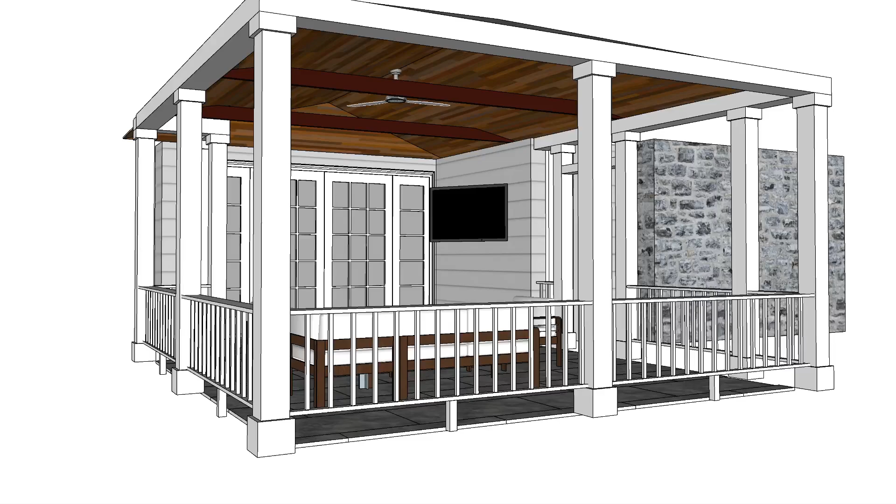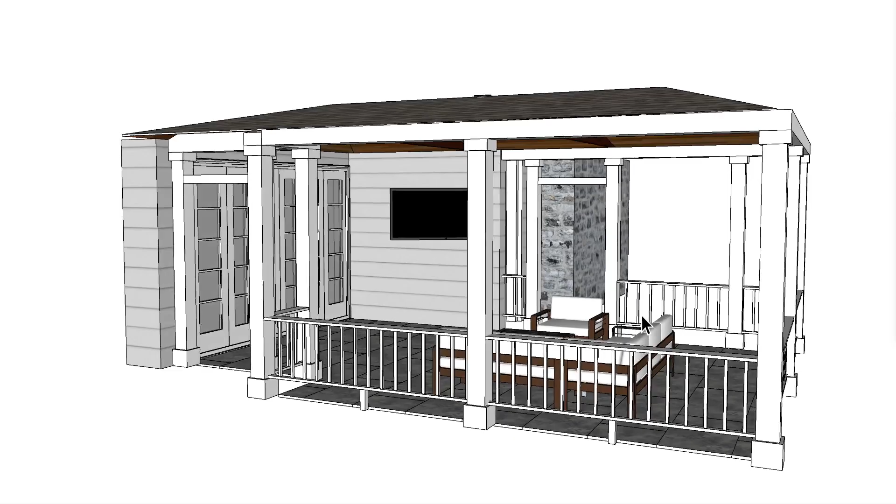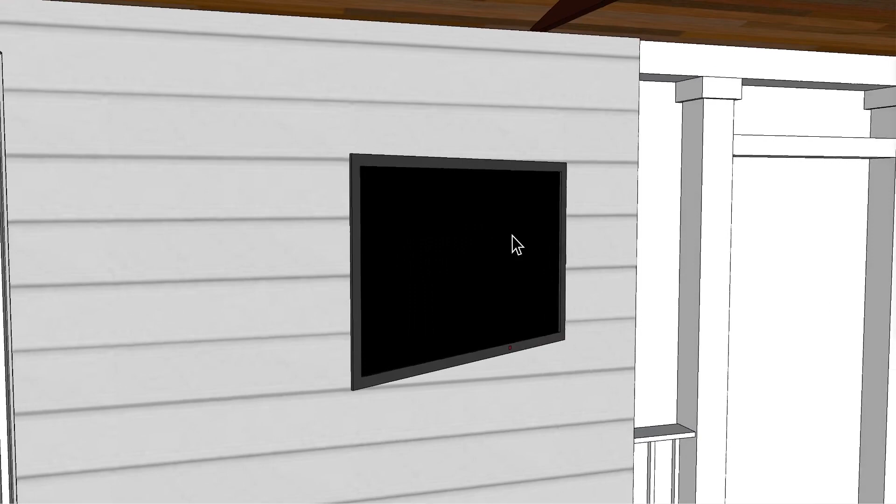Now let's get heating. All right, here we have this covered porch area, and basically we have a seating area over here. I think they said they had some tables out here at some point. There is a TV set. I have this at a 30-degree angle off the wall. I'm not quite sure the whole dimension of the TV, but you can see that it comes out probably a couple of feet from the back edge here when it is rotated.

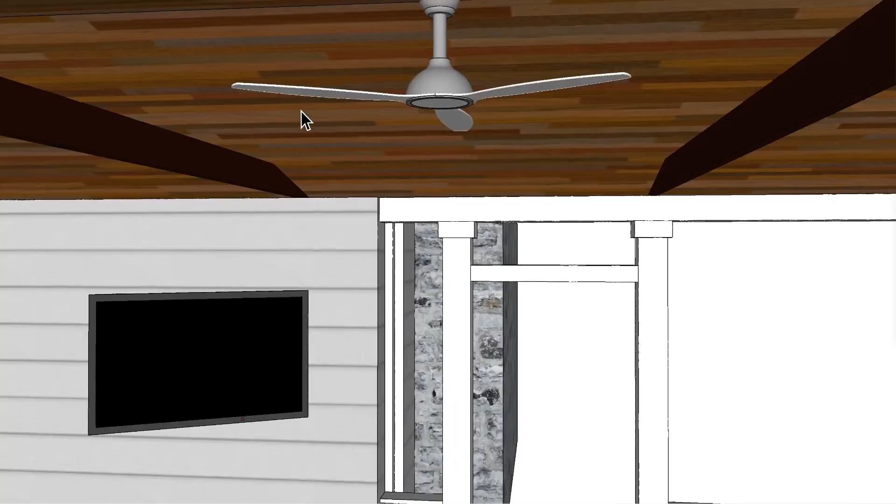There is a fan here in the center. Not quite sure how low it comes, but I have it, I think, at about the same level as the top of these beams coming across here. These beams, I just have 2x6s, and I'm not quite sure where they actually are sitting. I do have this one sitting on the center of these posts here, and this one over here I have at 6 inches further to the right. So I think that's about it.

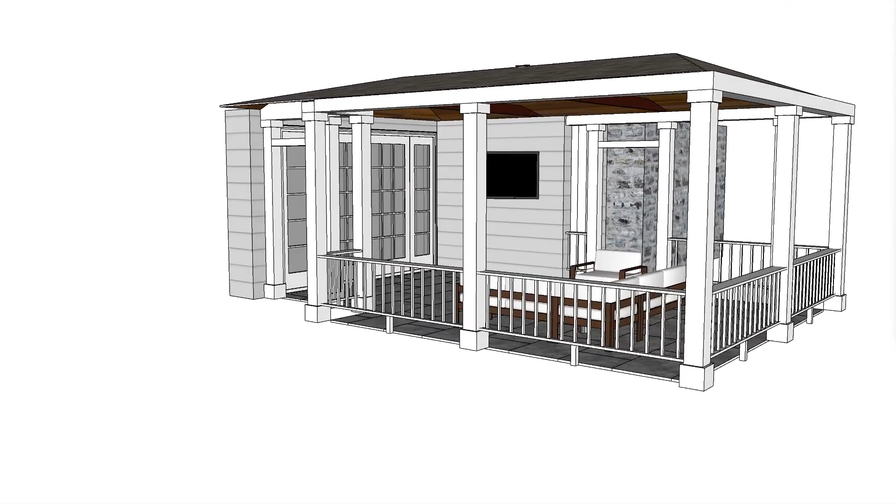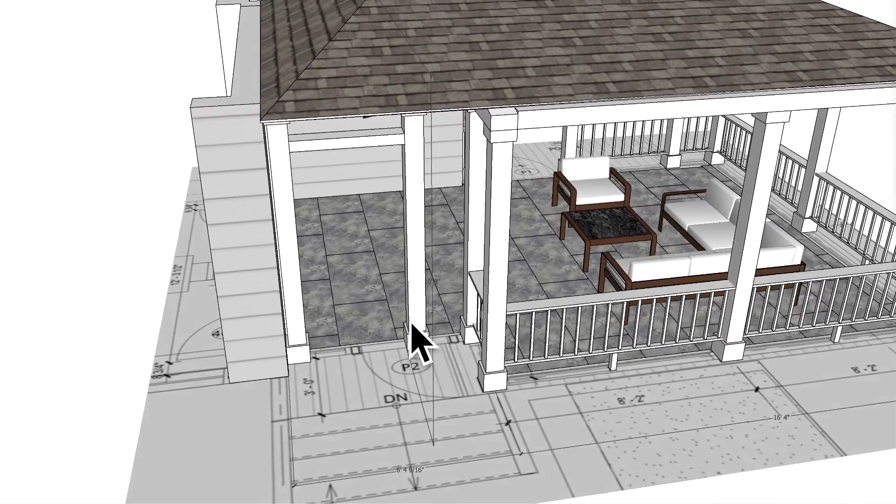Let's look at the overall dimensions. We have basically a 16.4 by 16.4 area. There's an extra 6'4" over here. This is an entry exit point. You can see the floor plan here. Basically, the floor plan has the entry exit point over here. Not quite sure about this beam here. The image was different than the floor plan.

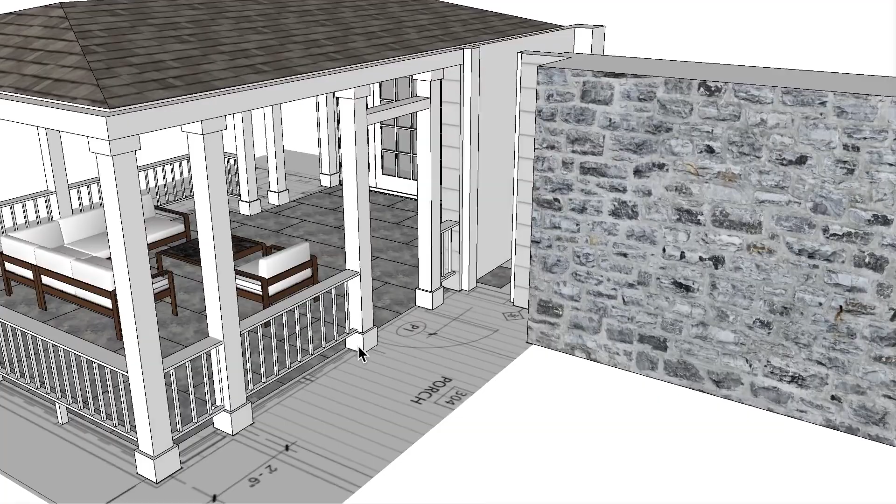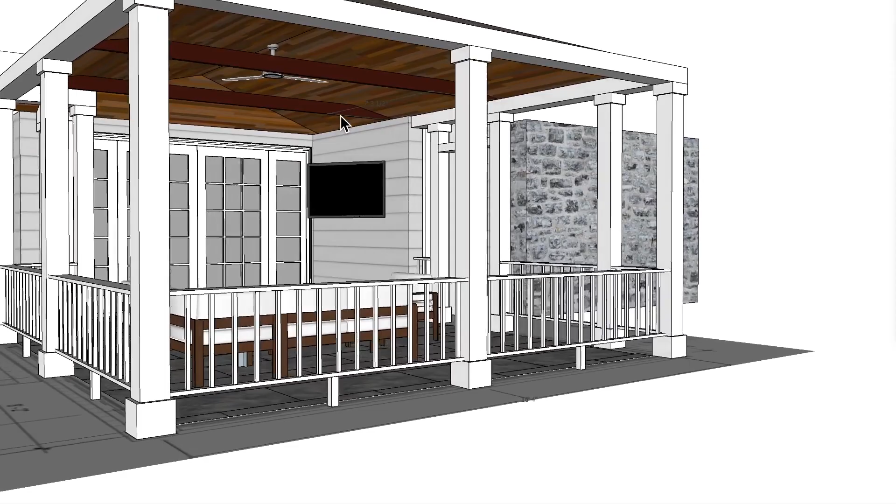You can see that the door swings out. This is a screened in area. So this door here swings out. These French doors, I don't have the same exact doors that they have, but they swing in to the residence. And then there's another section of the patio area that this screen door swings out to. So just remember, this is a screened in area, so using gas heaters may not be a good idea for this application, especially because there's no ventilation up here in the ceiling area.

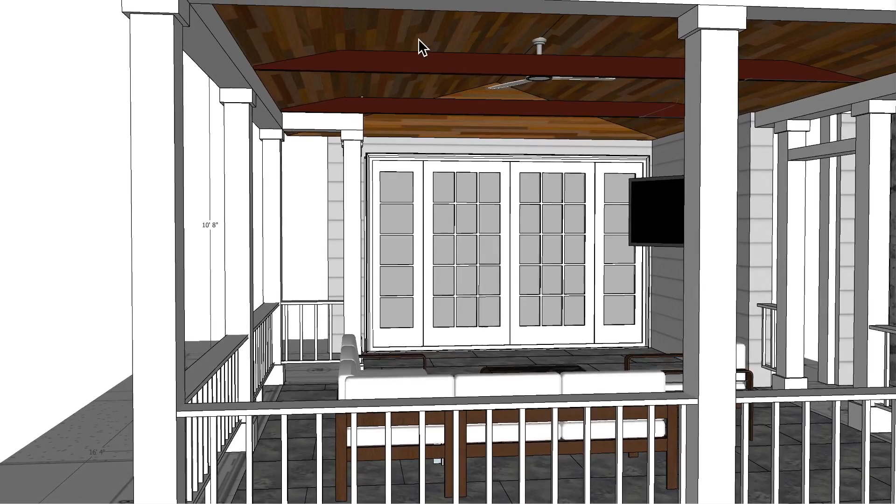Another thing, I got a 9-foot ceiling height starting point here on the edge, and then 10'8". So the slope I ended up with was, I believe, an 11.7 degree slope. I think they said it should be around a 12-degree slope, and I think that's about it. So let me go ahead and turn this and the dimensions off.

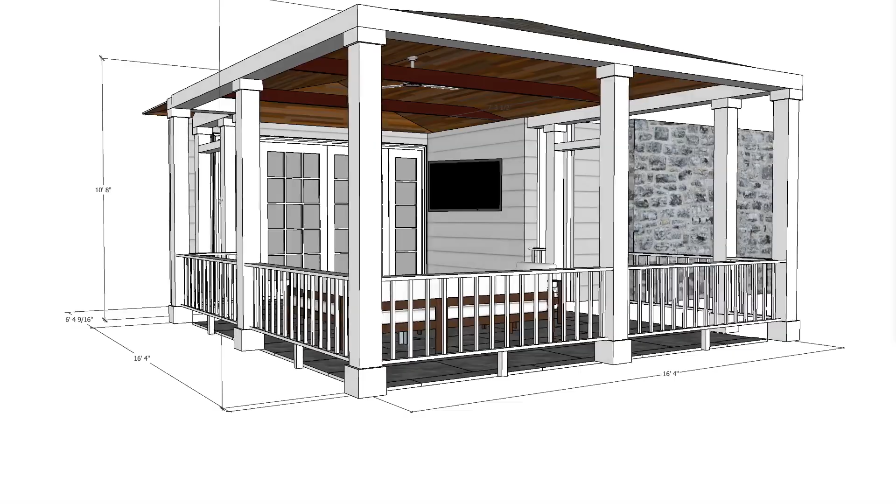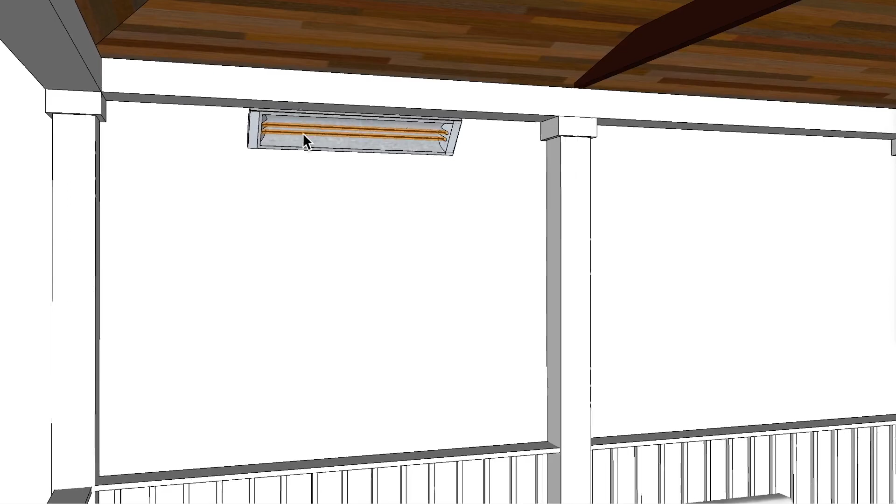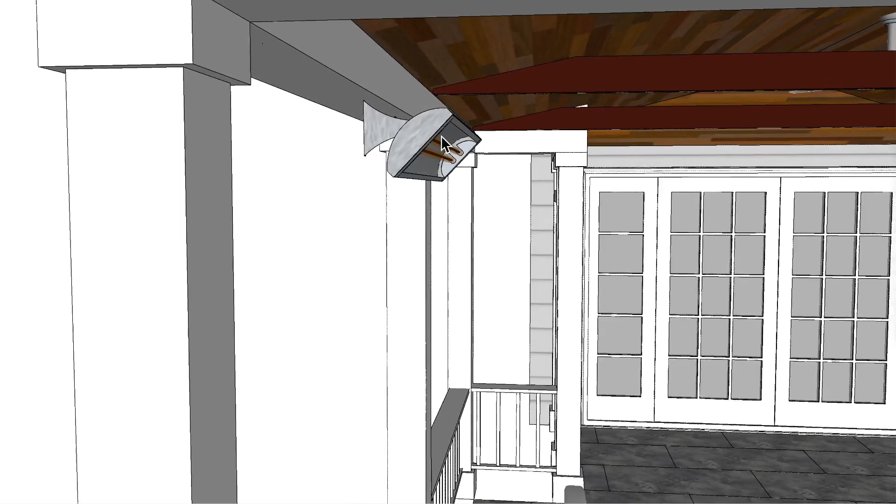First of all, putting the heater on the perimeter. Let's see if I can find that. So putting the heater on the perimeter, this is a CD model, a 5024, so a 39-inch long unit, dual element, 5,000 watt. Now if you're going to place it on a vertical surface like this with a ceiling above it, it calls for 12 inches of clearance. So it's pretty apparent that this won't work unless you were to somehow make a longer bracket or hang it from a chain or something of that nature.

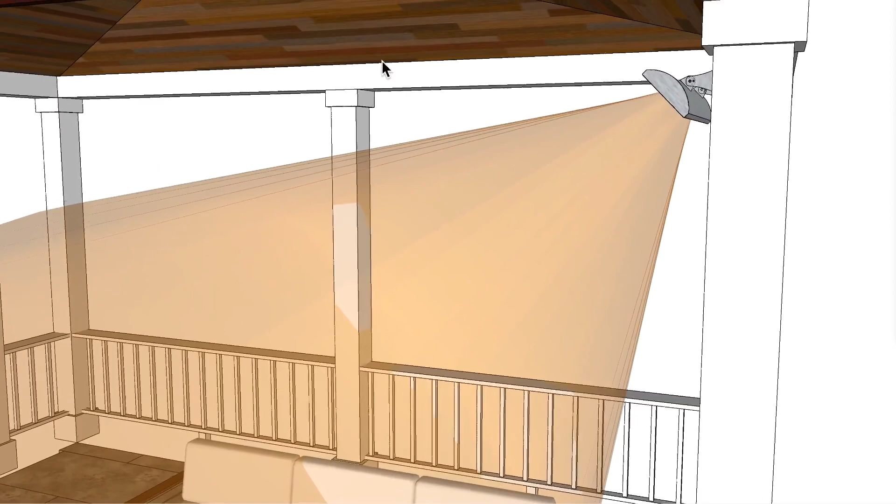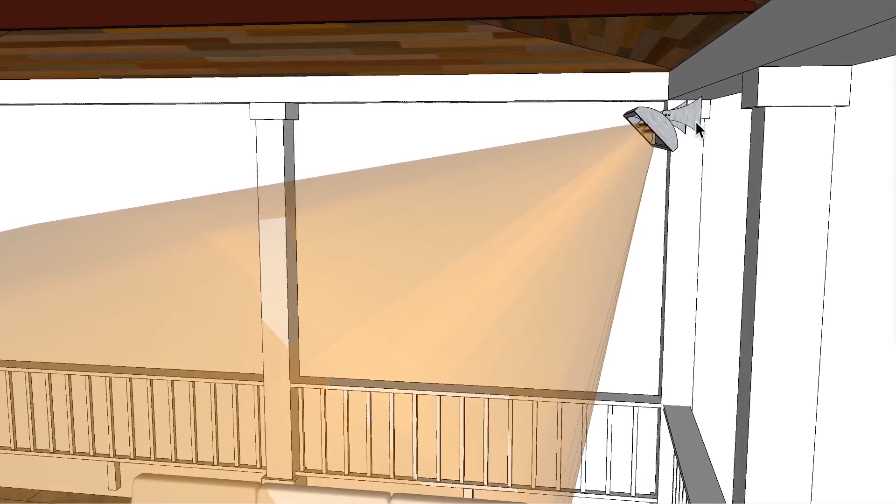And also, if you look at the ray here, the ray looks pretty good, but again, I don't see how we can mount that. I'm not quite sure of the true depth of this portion over here, but say that this ends up being about 6 to 10 inches high. We still don't have room to attach the bracket to it, so this is not something we're going to do. I just wanted you to see that I do look at all options.

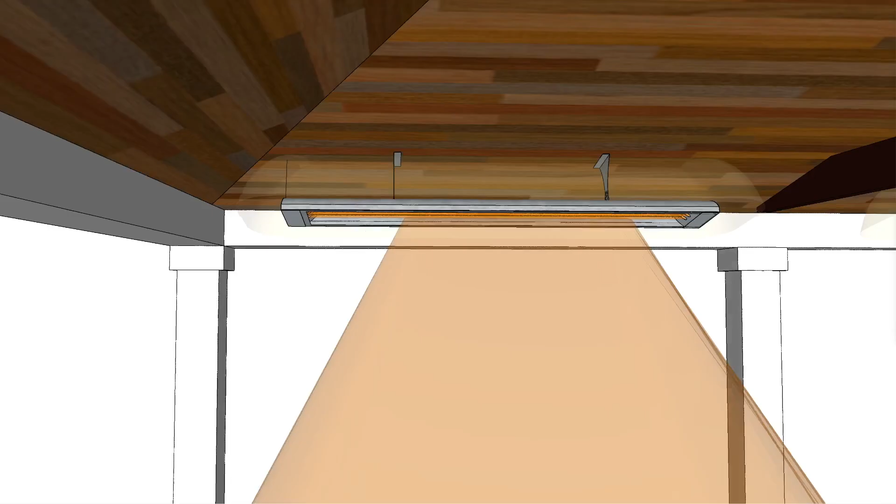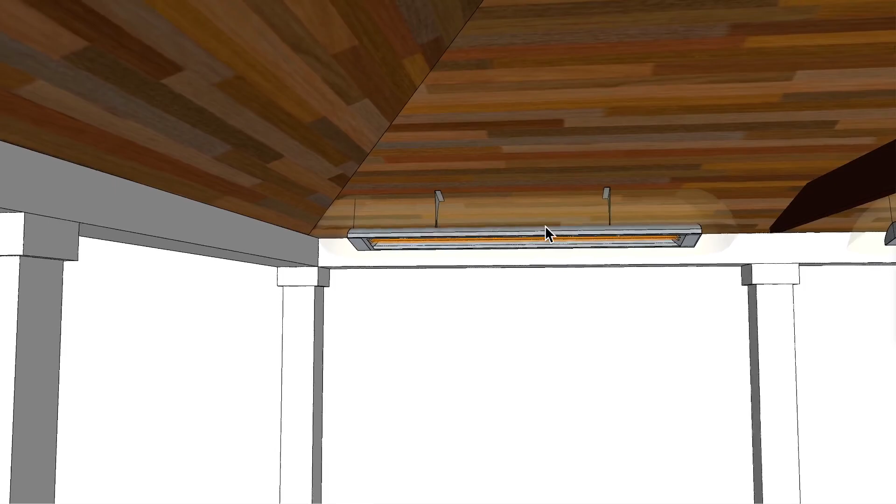So the next option would be, can we use a 6,000 watt unit? These are 6,000 watt 240 volt heaters. I like the unit itself, and the clearance above the unit looks good. Basically what I've done here is taken a measurement from this beam. Let me just turn off the ray for a second so I can maneuver. I've taken a measurement from this beam to the inside edge of the post here and centered the unit within that span.

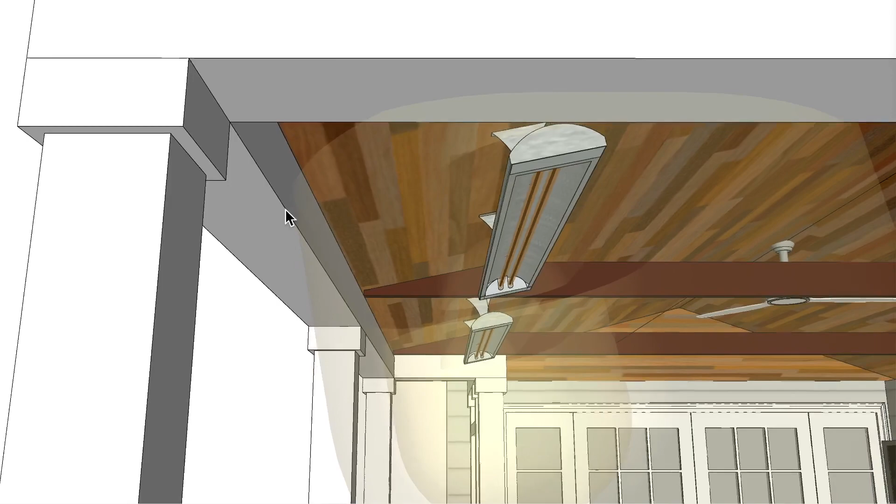You can see the top clearance is not an issue, but when I put on the bottom clearance here, we start to have an issue with the clearance over here. So basically what I've done is taken the heater and mounted it on the ceiling 18 inches up from this edge here.

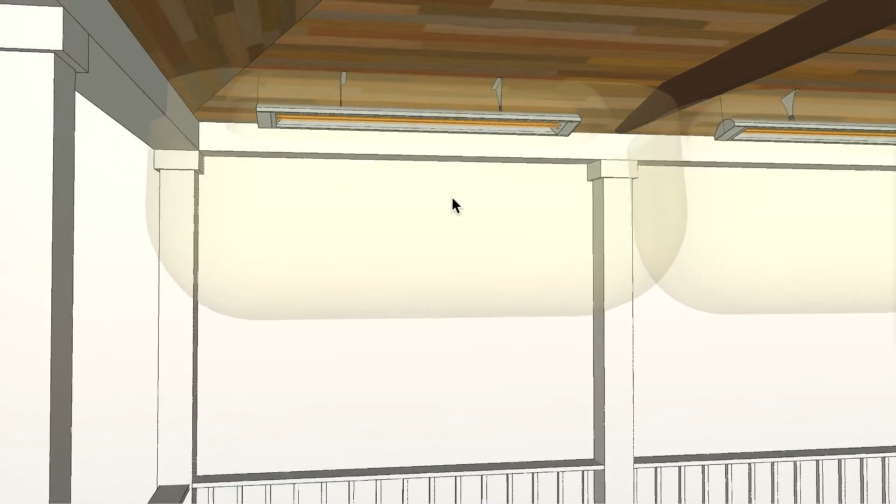You can see that when I go 18 inches up from the edge, from this side here of the heater, from this edge here, I'm actually gaining a little bit more because I'm going on a slope here, so it could actually come down slightly. But in any case, that's where I got my measurement: the 18 inches from the back edge there to that beam here.

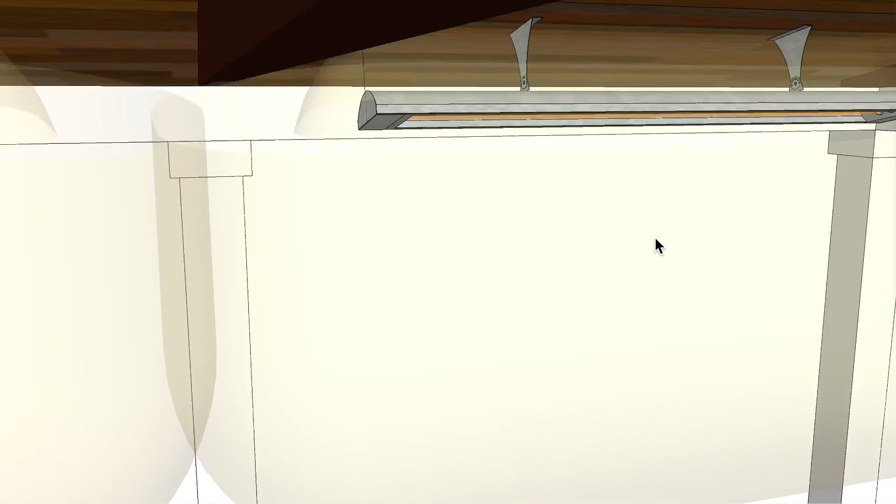Over here, you can see if I place the unit in this direction, then I have an issue with the beams again, and this portion of the patio, I think. Actually, we're meeting this here, but we're just not meeting this here perfectly. So that does become an issue, and you would have to either maybe slide this down just a hair, and still make sure that you're meeting your clearances back here, or utilize something different.

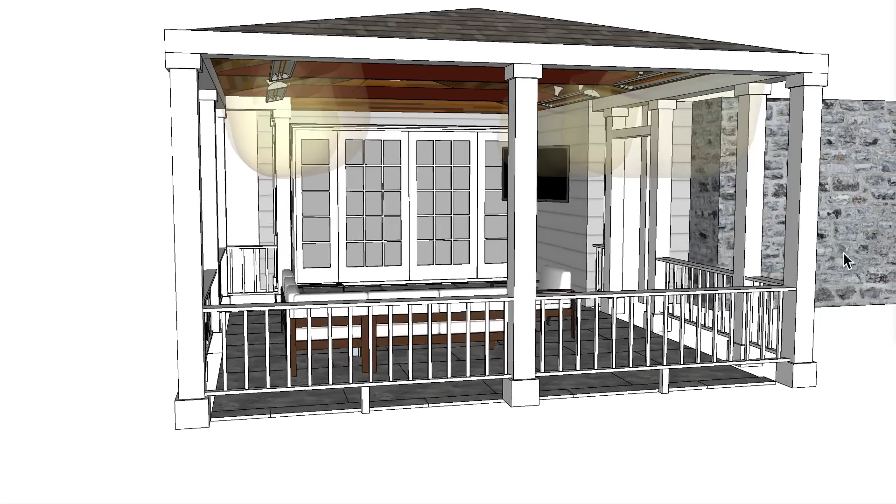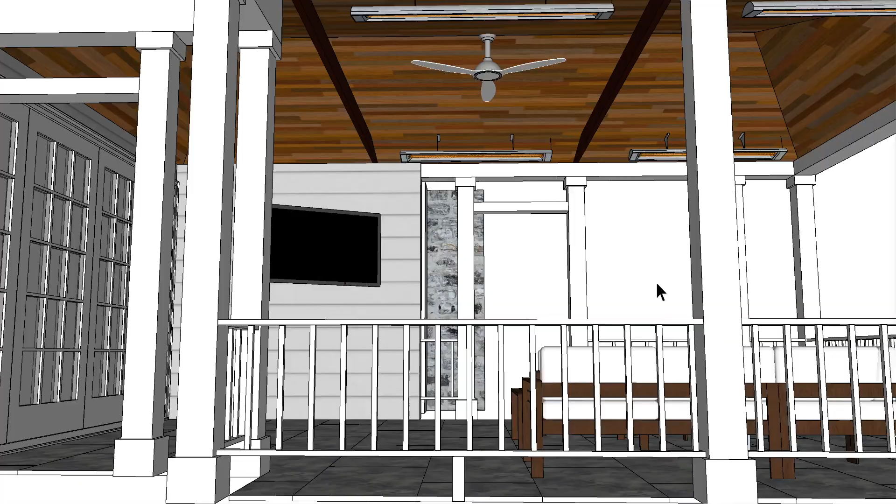But here you can see this is a really good application for this kind of space. We have very good coverage with this, and not knowing the exact distances between this beam and this beam does limit my recommendation in regards to that. Let me see if I can get rid of that line here. In any case, it's very close, within a fraction of an inch, to meet the clearances.

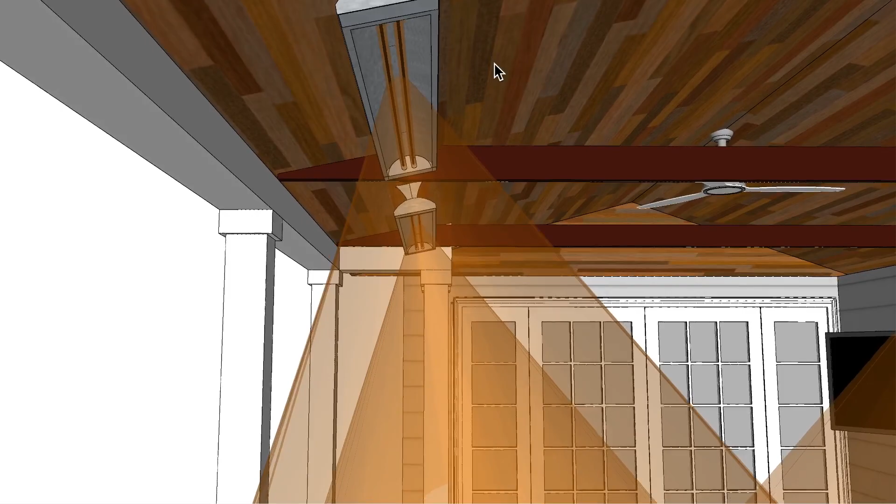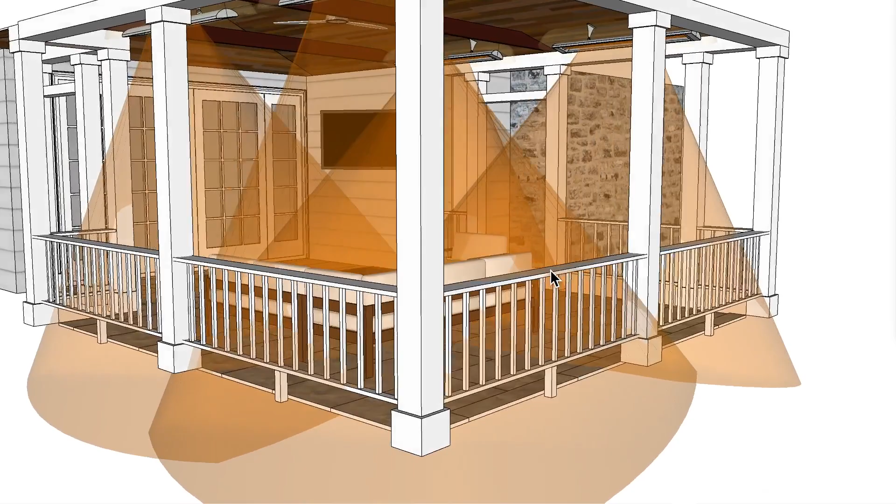So let's go ahead and look at the footprint of heat. I should also mention that the heater is at the same slope as the ceiling. So we're matching the ceiling, and therefore we're not required to worry about any other clearances other than the clearance above, and that clearance above is 6 inches from the top of the heater to the ceiling itself. So in any case, we have really good coverage, and this would be a very nice application, with the exception of that clearance on the lower side over here based on that beam.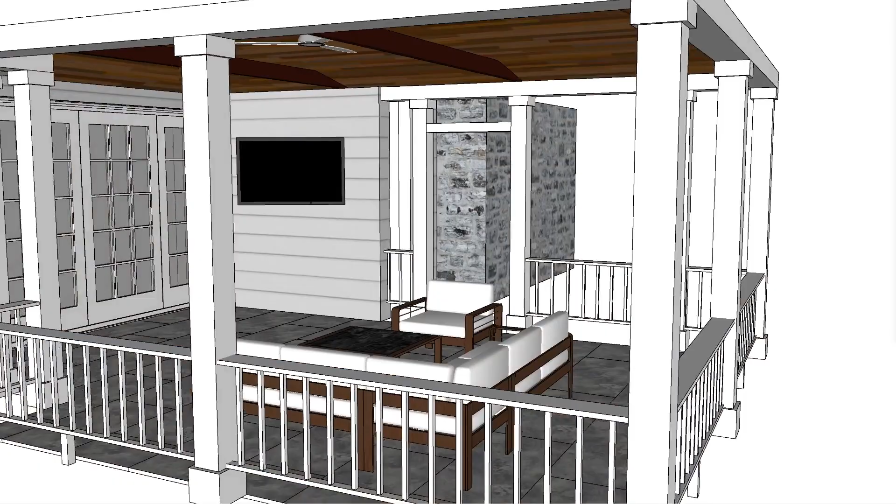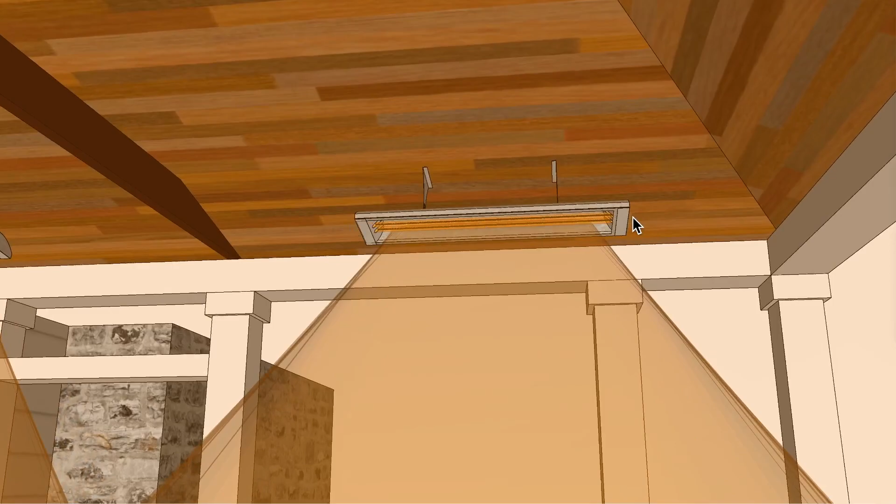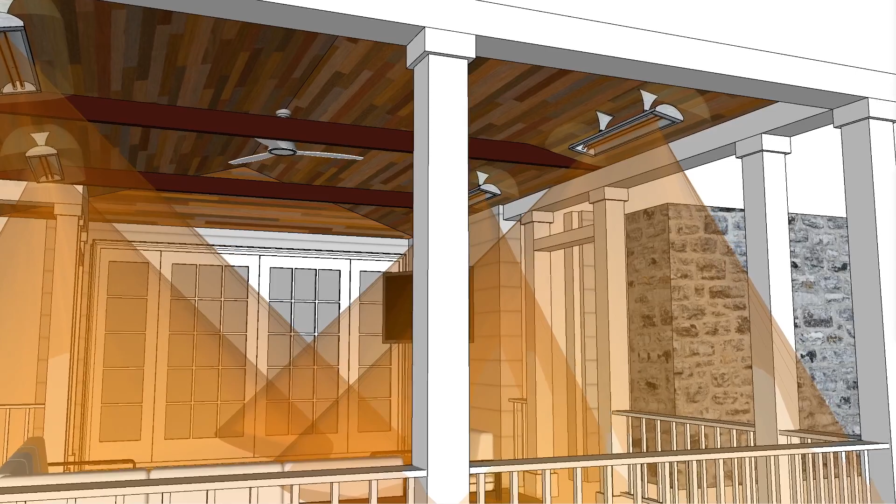All right, so let's go ahead and turn that off, and then look at the final option, which would be to place 4 of the 5,000 watt units. These are dual element units just like the 6,000, but they're shorter, 39 inches long. And we don't have those same clearance issues with regards to the length of the unit itself. The clearances are no problem with a 5,000 watt unit, and the coverage is really good as well. So this would be my overall recommendation for this application.

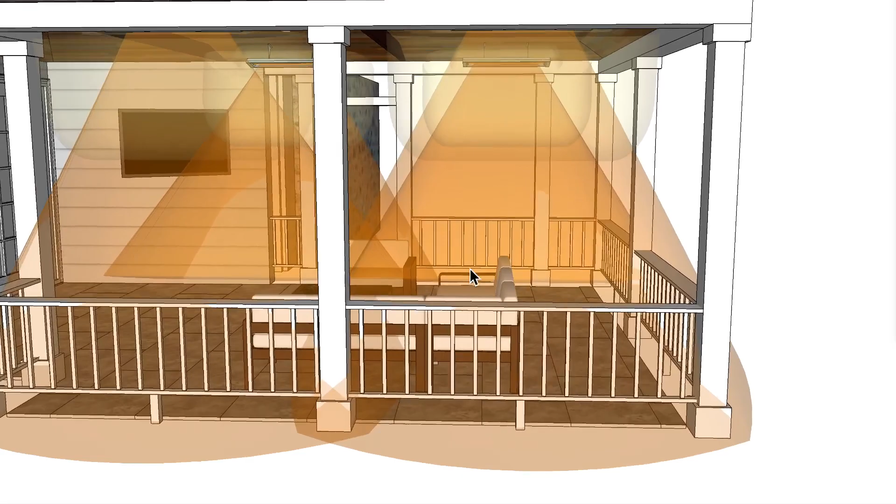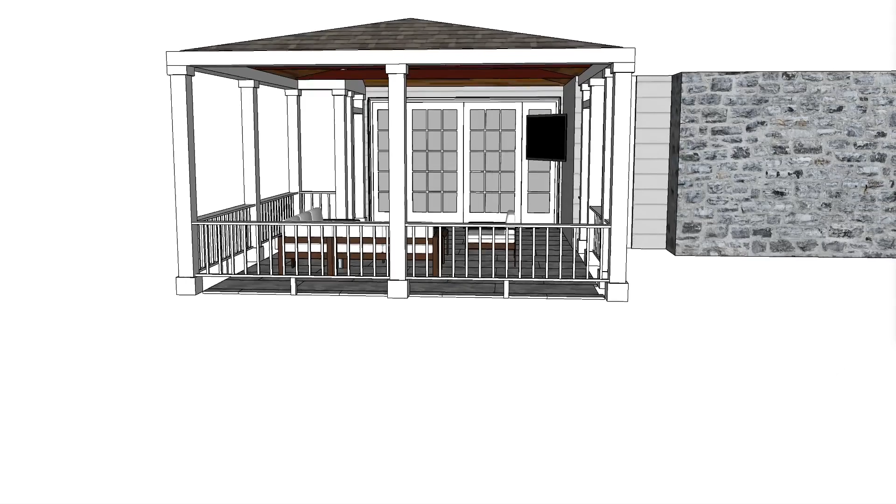Now you could place maybe just 2 of the heaters, something of that nature, but you're not going to get good coverage for the space that you're occupying. Also, if you were to place the heater here underneath, you could probably do that, and one over here. But again, the coverage is going to be very limited. So let's just go ahead and look at that option. And if you're the client here, you can give us a call and let us know what you think about that.

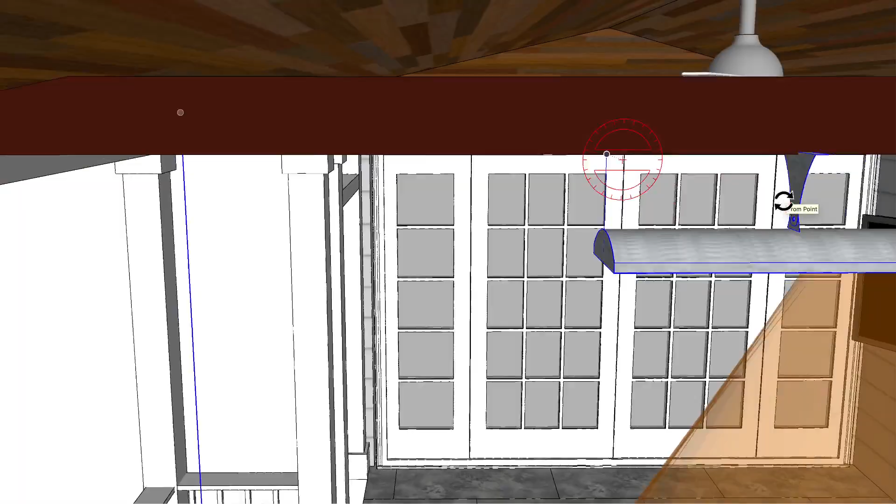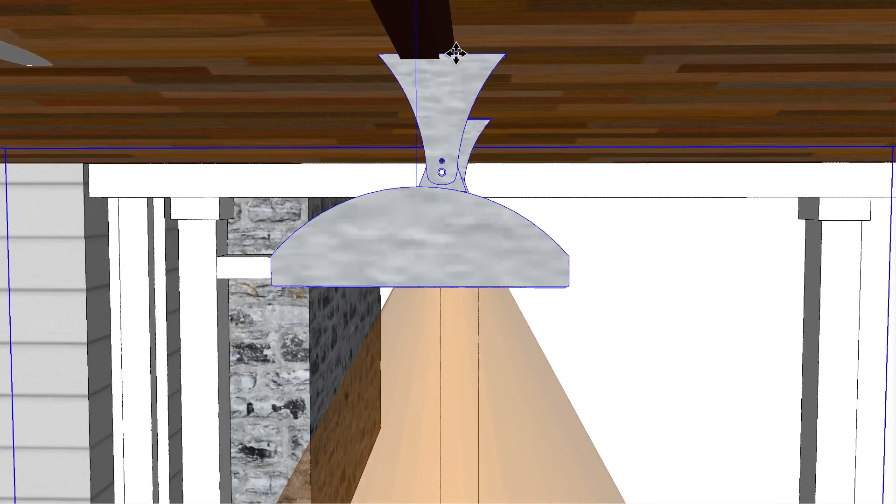Here is a CD6024 model, and we'll just plop it right up in here. Let me go ahead and change the angle here quickly and go with the 90-degree, and we'll center it within the span here. All right, so you could do something like this. This would work. Again, you'd have to come up with your own bracketry, because the brackets just aren't made for this mounting type.

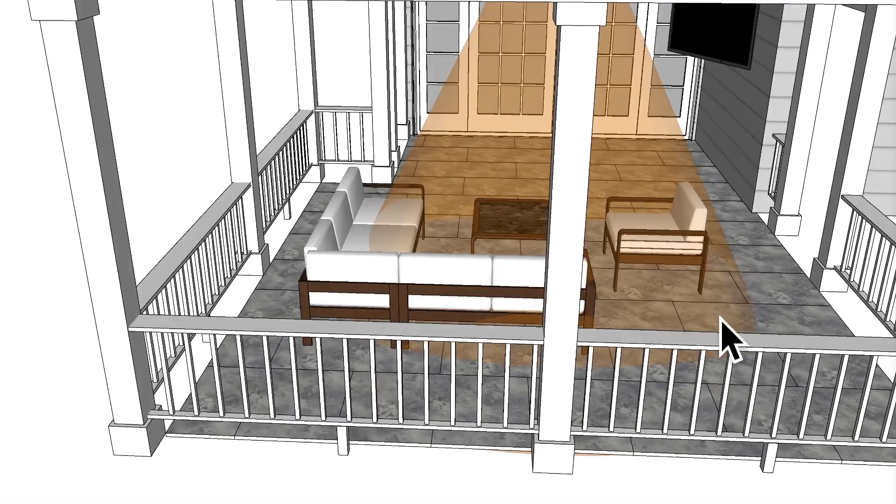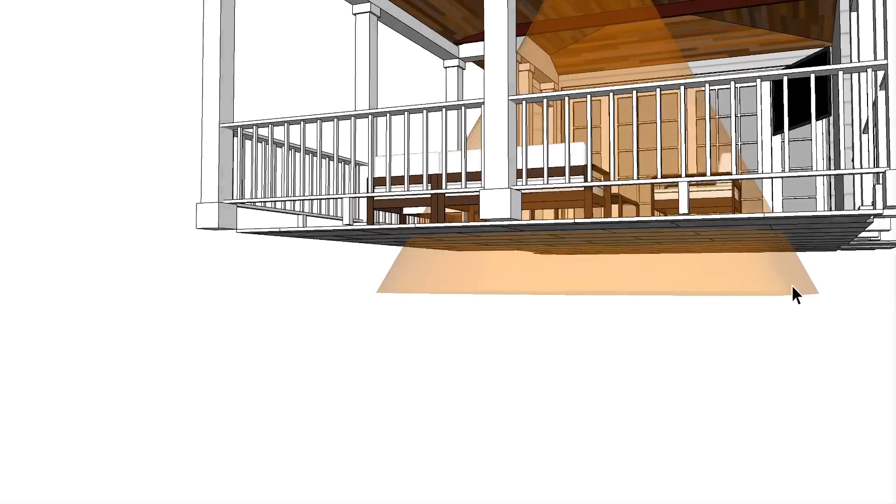However, here's a good coverage. It's not going to give you complete warmth here, but it'll give you roughly 11 foot this direction, up to 12 feet, and 10 feet this direction, and that's kind of the footprint you'll receive on something like that. Also, you can see it's made for a little bit higher of an application, so the spread is a little bit further apart. The 12 foot by 10 foot is really designed for a higher application, so this would be more intense than what is really recommended by the manufacturer.

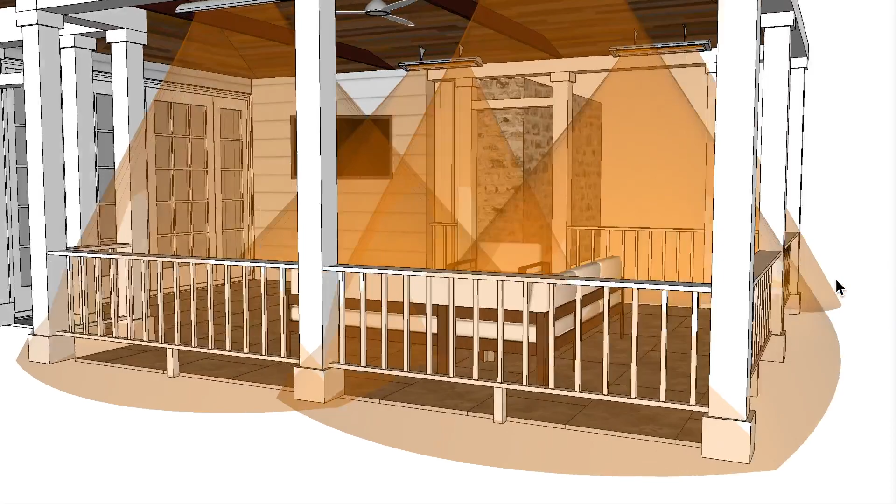So let me go ahead and get rid of that and just go back to the 5,000 watt units mounted in this orientation. I should also mention no problem with the TV at the 30-degree angle. And there you go. All right, well, I hope this has helped.